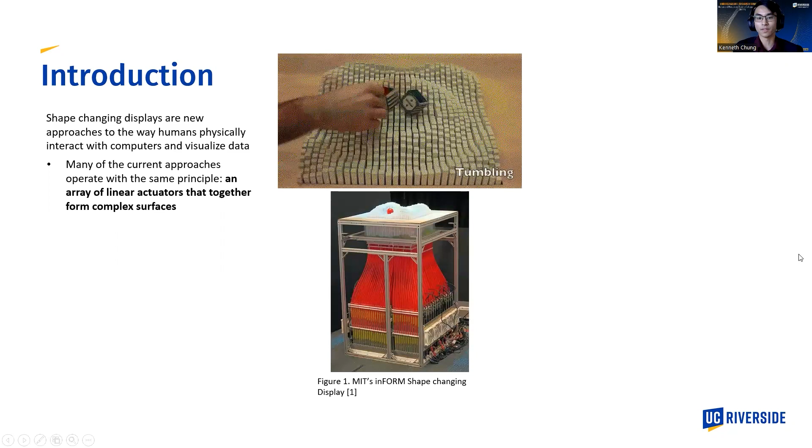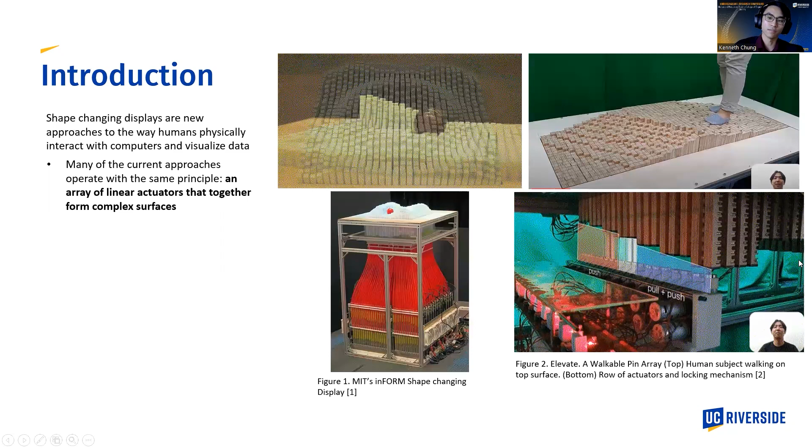So I have MIT's inFORM. You can see the individual pins raising to different heights all together because they are connected to their own motor by those red linkages. And then I have Elevate here, which is a little bit unique because the entire array is actuated by a moving set of actuators.

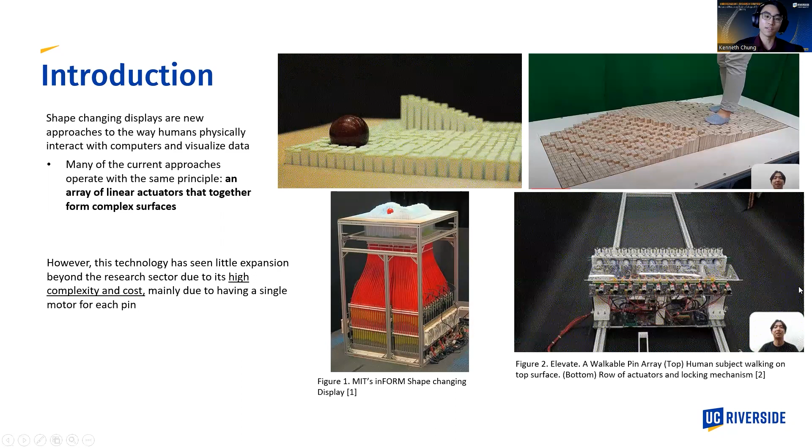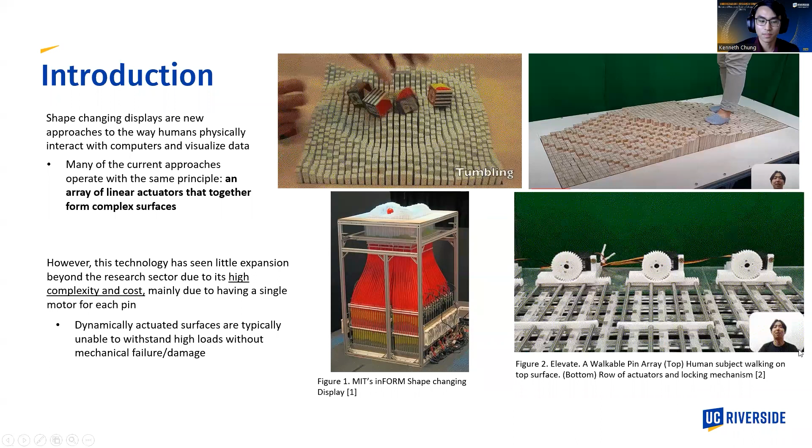But this technology has seen very little expansion beyond the research sector due to its high complexity and cost, mainly due to having a single motor per pin. And in addition, they're typically unable to withstand high loads without mechanical failure or component damage.

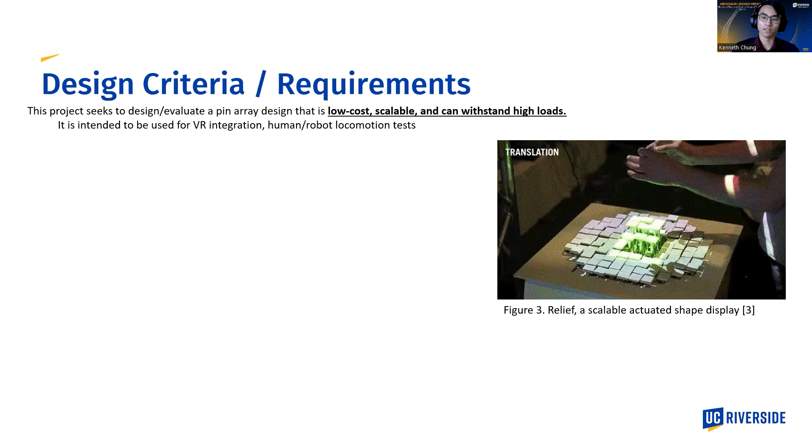So what my project seeks to do is to design and evaluate a pin array design that is low cost, scalable, and can withstand high loads. It is intended to be used for applications such as VR integration and human robot locomotion tests. With this design, I also will explore how different actuation styles can be implemented.

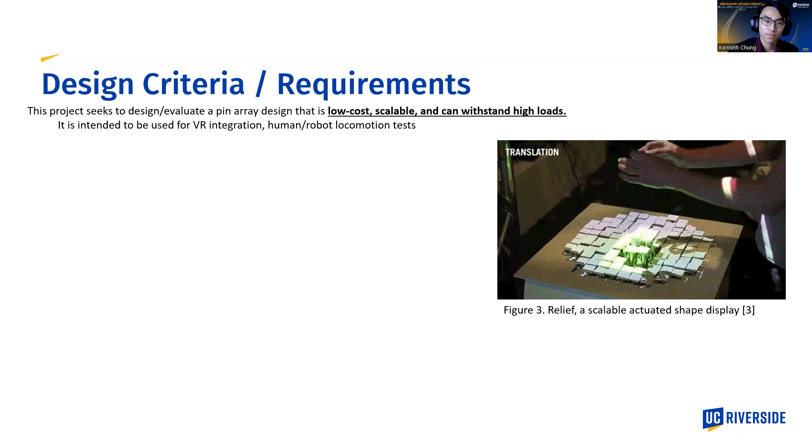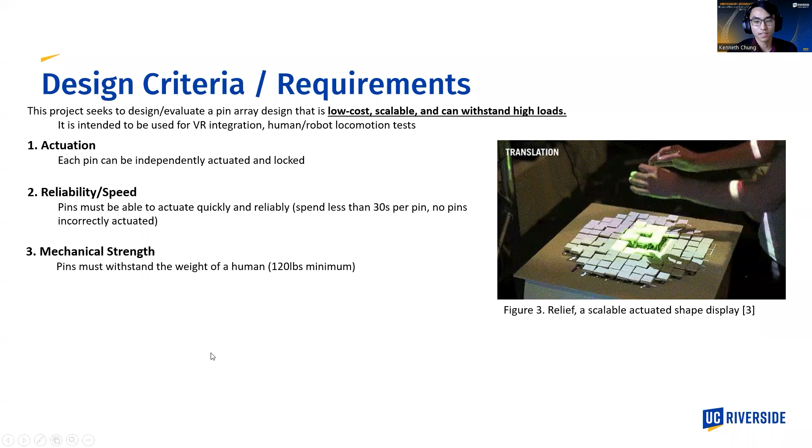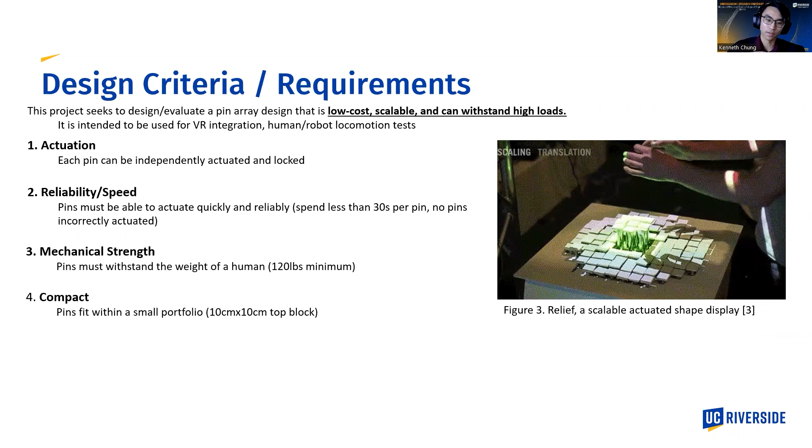These requirements can be broken down into specific criteria, and these criteria are actuation: I've got to make sure that the pins can be accurately actuated, and it's got to be reliable and fast. It's got to have mechanical strength. We're going to be loading it with a human, so it's got to withstand at least 120 pounds. It's got to be compact, so I'm limiting myself to around 10 by 10 centimeters. It's got to be low cost, so roughly $10 per pin as an estimate.

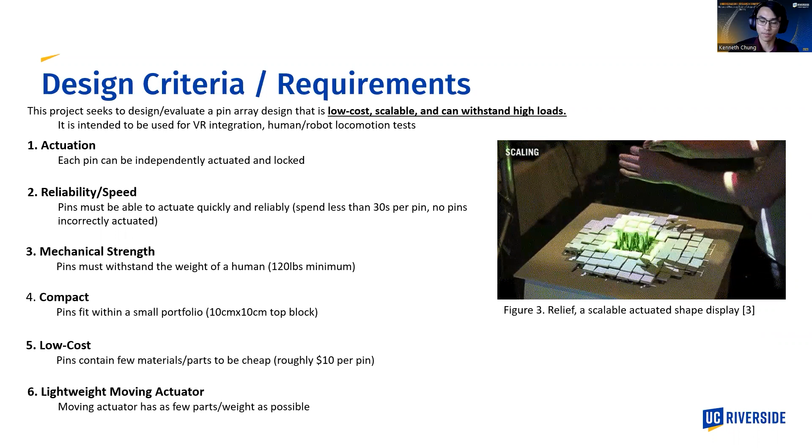And when we're thinking about an actuator, although this could be a project on its own, the actuator has got to be lightweight so that it could be fast and accurate. And this is a project that I started in winter quarter of this year, and I plan to complete it by the end of this quarter.

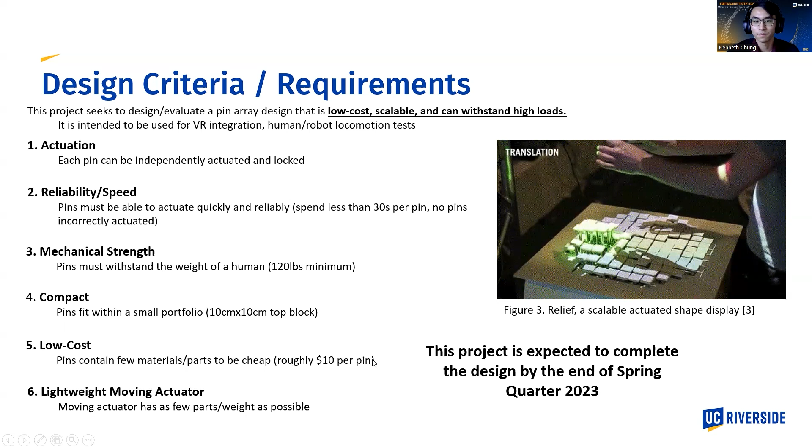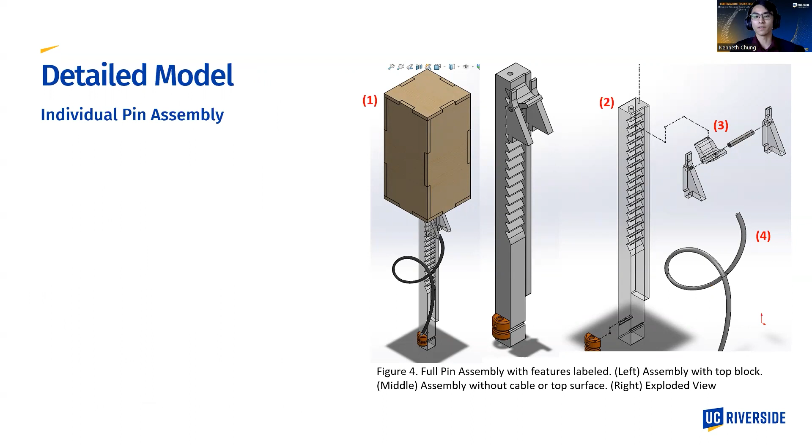So because parts are currently in shipping for most of the prototype, what I'll be showing you is the detailed model of the pin array as well as a preliminary prototype that I made just to test tolerances and make additional adjustments. So this right here is the individual pin assembly, and it contains the top surface block there. You can see it's made of 6 laser cut plywood panels.

We have a rack, and it's just this rectangular bar labeled number 2, and it has a bunch of teeth in it, and that will be engaging with a pawl. And that pawl kind of operates like a seesaw and will be able to rotate out of the way and allow that rack to move up and down freely.

And that pawl is able to rotate by a Bowden cable system. So it's essentially a fancy name for a bike cable, and it'll be able to pull down on the end of the pawl and move it out. And it's able to do so at the very end of the rack. And all these components are planned to be glued together unless otherwise specified, just to reduce cost and weight.

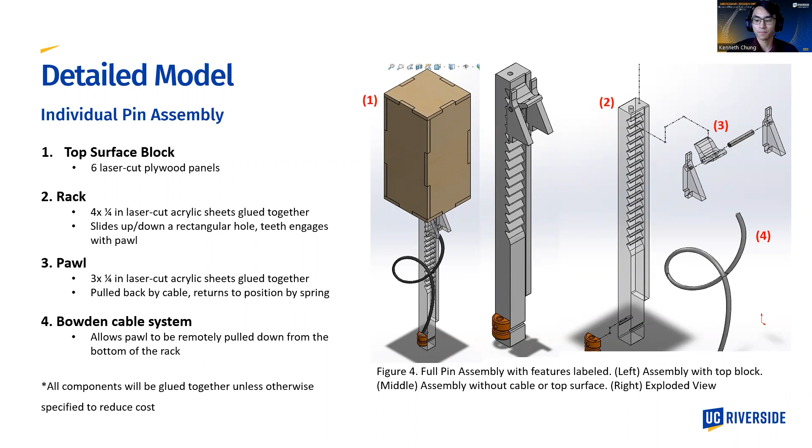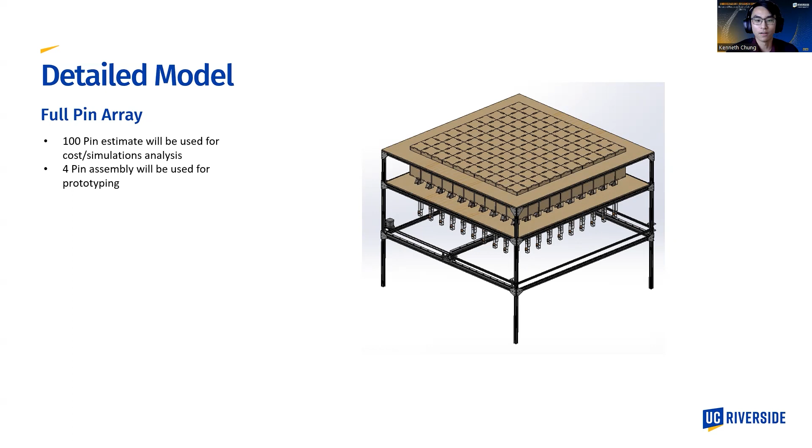So when thinking about cost and simulation analysis, a 100 pin estimate will be used, and this is what it might look like. However, for practicality, only 4 pins will be used for prototyping. So the figures that I will show now are just to demonstrate what it might look like in motion. So this is just the lowest and the highest position of the pins.

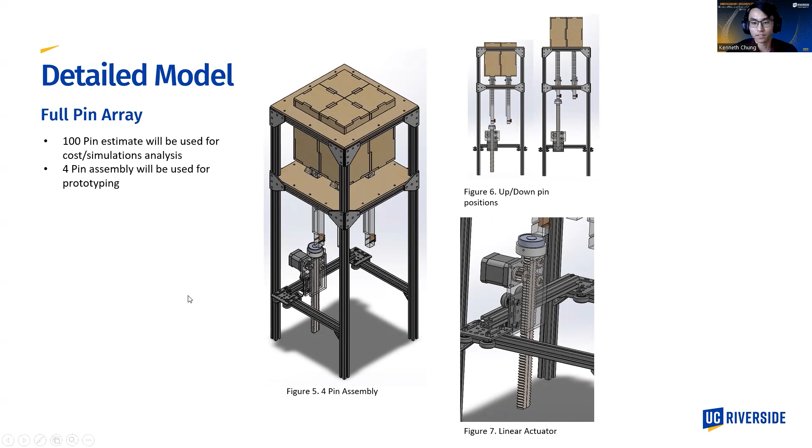And this is just a zoomed in version of the linear actuator. You can see it's driven by a singular motor. This is a size comparison to a human dummy, so it reaches around your waist. And this is the pawl mechanism with a spring modeled in.

So additional features on this assembly: it has an electromagnet. It's that cylindrical puck at the end of that linear actuator. That enables you to pull the pin down. And unfortunately, this gantry will not be actuated. It won't move automatically because it's a small size and it's kind of irrelevant for tests.

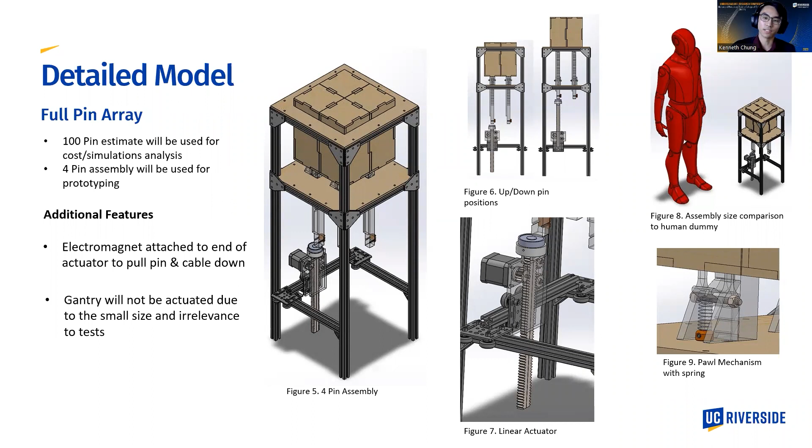Although when you scale it up to 100 pins, it might work in a similar fashion to a 3D printer, or you might even scrap it entirely and add in a swarm of mobile robots. So when I was doing that prototype to evaluate tolerances, I made all the parts to be manufactured entirely by laser cut.

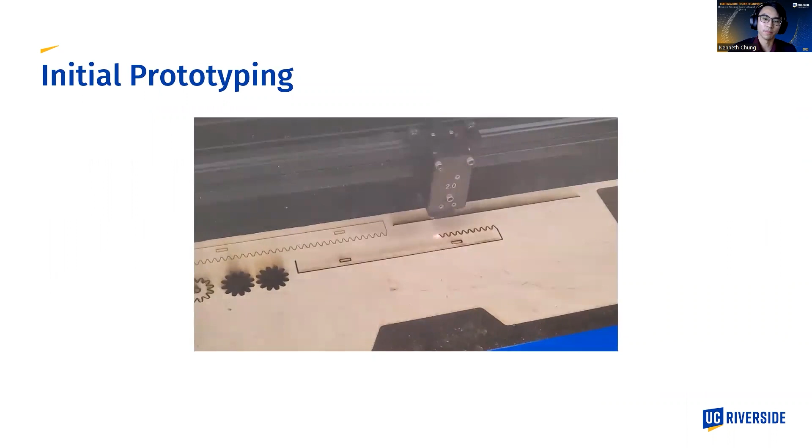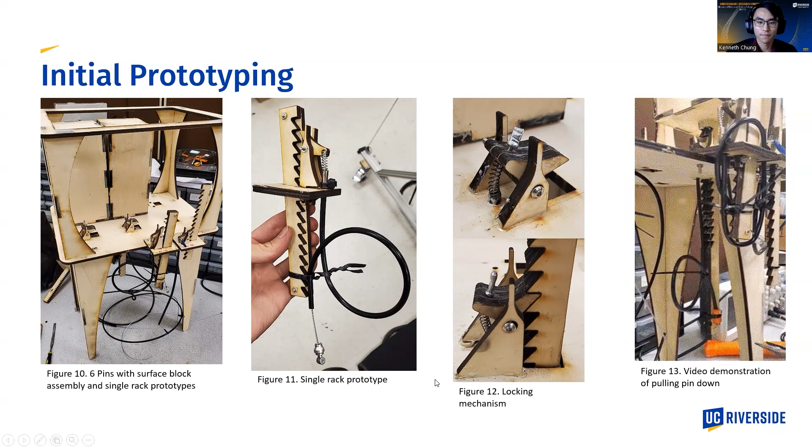So to ensure that I cover all the requirements that I set out in the criteria, I performed some static simulations and calculations beforehand. So first, it's a static simulation. So I set the material to acrylic, put a 120-pound load on the very top, and it estimates around a 2.73 factor of safety, and it fails at that pawl.

So what that means is that I can load 2.73 times the 120-pound load on top of it without it failing. And it's good that it fails at the pawl because that means it fails on a component that is really small and easy to replace, versus the rack, which might collide if it bends.

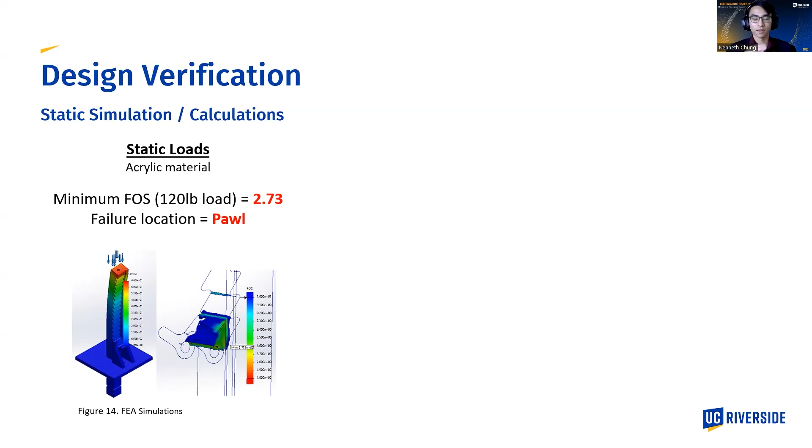Frictional losses to the Bowden cable, this is very important because we need to estimate how much force I need to put into the cable to pull back that pawl. So this is an experiment that was run by the paper titled here. And using their equations and findings, this is why when you looked at that cable I was pointing out, it has a singular loop. It makes it a lot easier to calculate that. So it estimates around 22% loss. So you need to put in 22% more force than you might expect.

And because I'm pulling down at the end using a magnet, I need to estimate that as well. So using a 20 centimeter electromagnet, I estimate something as small as an M3 nut, which is the size of half your pinky finger, comes to around 0.7% of the original rated pull. But because that's really, really small, I need to consider for the future custom machining something out of iron that maximizes the amount of area to get something around 44% of the original rated pull.

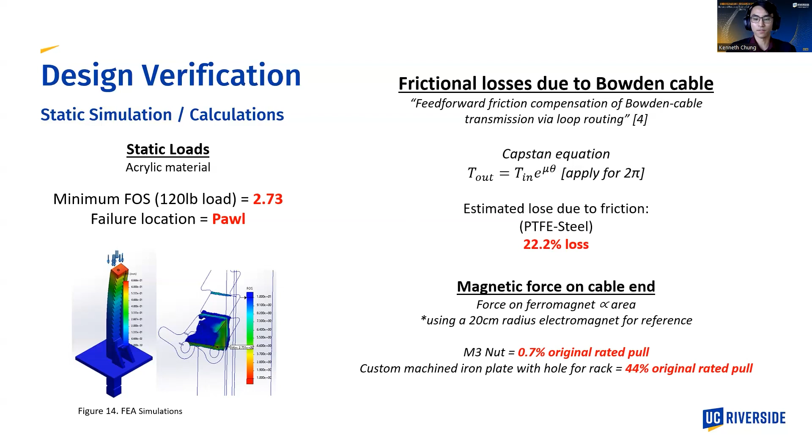And the original pull is just placing a puck, an iron-like cylinder that maximizes the radius of the electromagnet, on top. And that's just reported in data sheets.

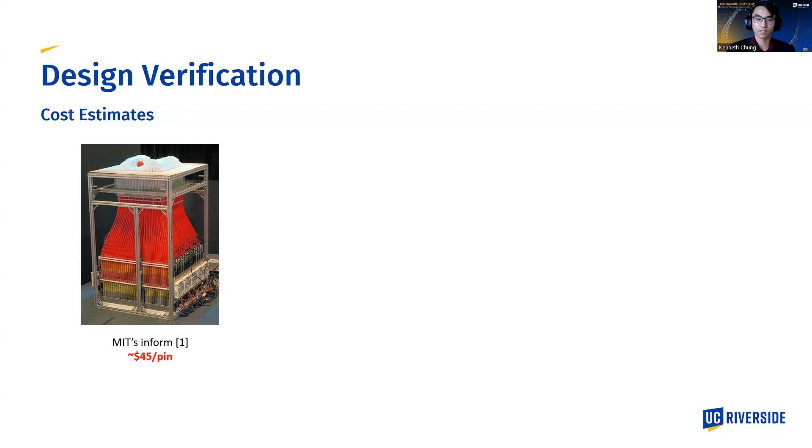So for cost and making sure it's low cost or not, I use the two examples that I introduced in the introduction. So here is MIT's inFORM. You get around $45 per pin. I estimate this by taking all the materials of the pins and the motors and averaging it out across the entire assembly. Theirs is really high because they use high quality motors. Elevate is around $11.5. Theirs is really cheap because there's not a motor per pin. And mine comes to around $9 per pin.

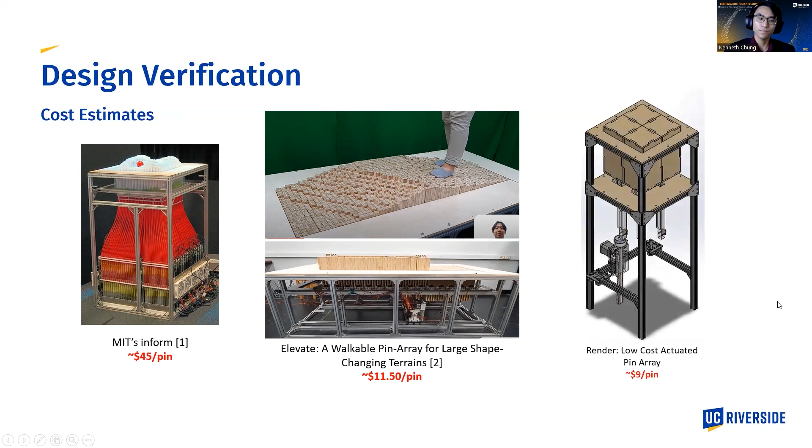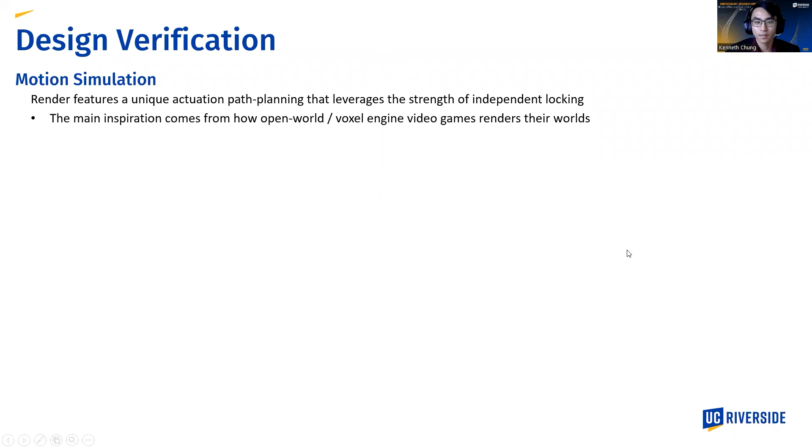And because of the independent locking feature of the pins, this allows me to explore a unique actuation path that allows me to expand it to a mobile robot swarm. This inspiration comes from how open world games render their world. So a common example would be Minecraft.